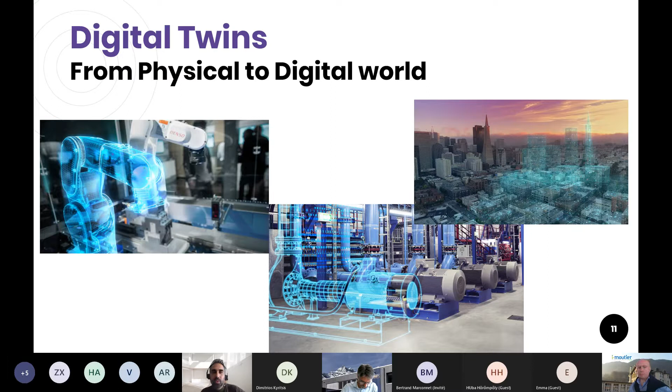The idea of the digital twin is really to create a numerical or digital twin, or double, of the production site or of everything. One of the examples I have clearly in my daily business is building information modeling, perhaps far from the pure production site, but it's really the same spirit. Building information modeling is really to create a twin of infrastructures and to make some predictive or prescriptive models of what will happen, how I can be better, what will be the impact of this information. The idea is really to master what will happen, to make the predictive option and to see what will happen.

To give you at least one example, it is linked to one of the flagship initiatives led at EPFL and from my faculty to create a digital twin on an urban data platform of cities. It's really the same message, and after that will be the presentation of Dimitris to explain it at the level of industries and production sites in manufacturing. The idea of the Blue City project is to create a digital twin of our cities and to make different digital twins of the mobility, the waste management, the energy consumption, the circular economy of raw material, local resource constraints.

Through all the data collected in these different fields, we will create these digital twins, and we will be able to see and to predict what will be better for a better impact on climate change from the city, better air quality, better traffic, and so on, to have these models from artificial intelligence and to predict what will happen.

So now I will give the floor to Dimitris to go further about what digitalization is, but the key message on my side is that digitalization really brings opportunities. This new technology can help industries to be more efficient, to tackle some big problems and to be more agile on the market.

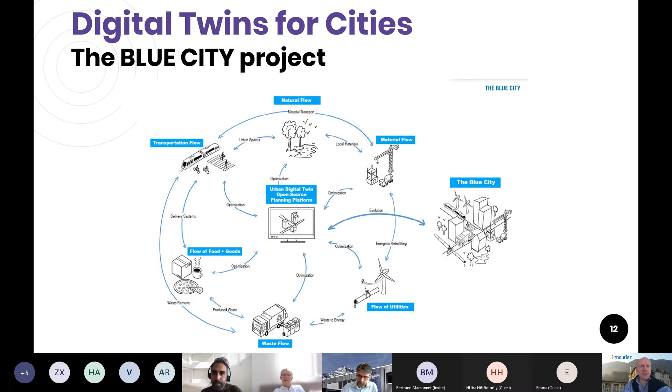Can you give me the right to share my screen? Yes, you can. Not yet. You can't share the screen yourself? No, not yet. The share button is gray in my case. Okay. Just give me a second. It says only meeting organizers and presenters can share. Yeah, it's okay. Is it okay? I think so. Let me find. Can you see my screen now? Yes.

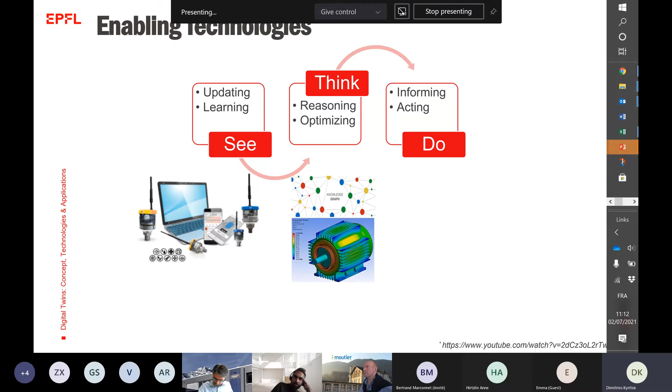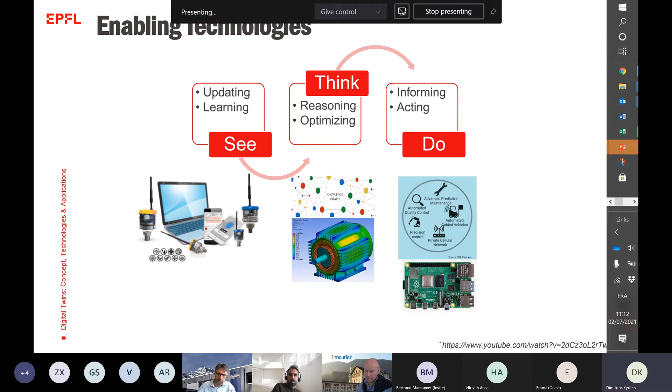How we think and reason: we connect all these elements about the functioning of this motor, for example, where this digital twin allows us to see the performance by visualizing various parameters in color. This allows us to reason automatically, if we can, by applying algorithms, or interactively by visualizing information, and then we act. For example, we apply maintenance, or we improve the design of an electronic component, or we inform somebody else in the value chain to do something.

Internet of Things, as we said before, is one of the basic elements that generated this concept of digital twins. Why? Because it allows us to connect the physical part of the concept to the virtual part, using sensors on the physical part to capture the data and communicating this data to the virtual part and back, of course, to elements of the physical asset when we need to act. So a digital twin may be an actionable digital twin and allow actions to happen on the physical. And as you see here, we have three types of elements.

First of all, the sensors and other devices that can be used as sensors, virtual sensors, for example, ID parts, mainly wireless ID components like RFIDs, and then the communication elements, in various dimensions. You can start with Bluetooth, Wi-Fi, 5G, and Internet connectivity technologies. And how do we use all of this data that's collected and communicated in the Internet of Things? We are using computers, either very close to or on the machine, which is edge computing, or somewhere at the factory level.

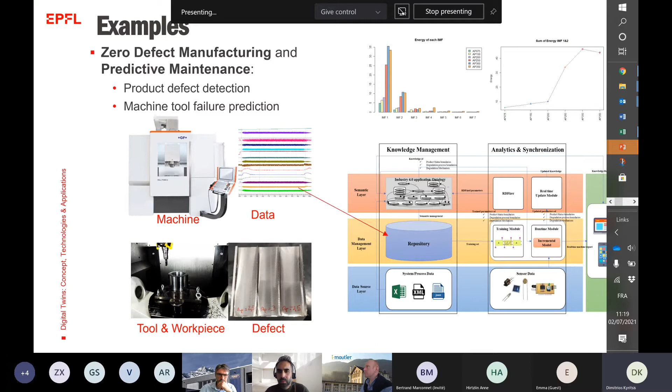And applying various types of tools - RDFizer, for example, is an open source tool to transform an ontology into a knowledge graph - and then analytics of this knowledge graph using various technologies to visualize data and decide, taking actions, calculating the remaining useful life, for example. You see here examples of visualizing machining data that we capture from machines, which allows taking decisions according to the objective.

The concept of zero defect manufacturing is also emerging, and it allows observing and measuring data in the two main actors of the manufacturing process: the product itself, which is the output of the machining process, and we are able, using metrology technologies and sensors, to capture data in various phases of the product's life cycle.

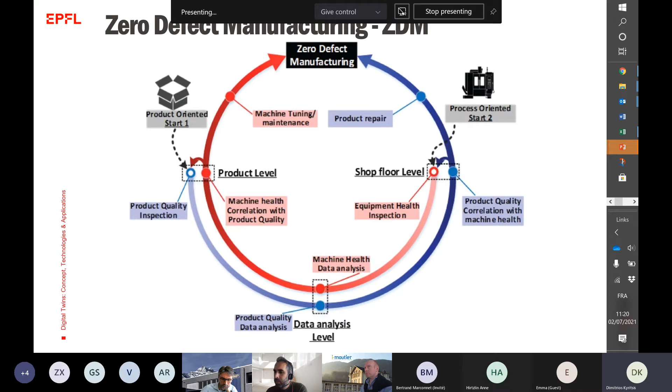And at the same time, when we produce these parts, we observe the health status of the equipment, the machine. In order to allow zero defect manufacturing, the output of the process is the quality of the product. Measuring elements of quality at the product level and at the process level, and correlating these two types of data using digital twin in the virtual world, allows us to detect possible types of defects, repair them if possible, and predict by analyzing the data we collect possible defects. If we are able to predict, we can prevent them. All these strategies of detection, prediction, repair, and prevention mainly contribute to zero defect products and zero waste of the process.

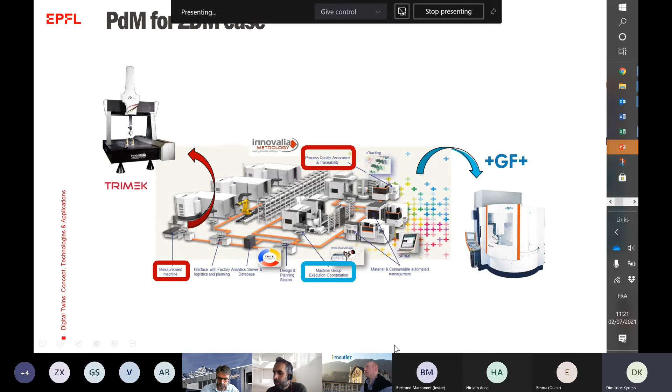So we implemented this concept using metrology technology. Trimek is a metrology machine, and machining technologies, a milling machine, provided by Georg Fischer here. In the case of producing a spindle used in this machine, along the assembly and manufacturing steps, we implemented what we call a predictive manufacturing framework. We collect data from the process - milling machines, CDM machines - and from the product, using metrology inspection machines. We manage this data along their life cycle, structured semantically using ontologies, in what we call a semantic framework.

The output is structured data in the form of a knowledge graph, and by applying appropriate algorithms using digital twins, we can visualize the data so humans can take decisions, or we apply decision support systems and algorithms to take decisions somehow automatically. This was implemented at Georg Fischer with the help of other partners using the Microsoft Azure platform, which offers the possibility to structure the data in this semantic form.

So what we illustrate here is that we collect data during the production of the spindle in various forms - PDFs, text, Excel, or direct data from measuring machines and machine tools, or sensors. All of this is structured in semantic form and then analyzed, for example using Power BI, to be used by various stakeholders - R&D to improve the design, customers, production engineers, etc.

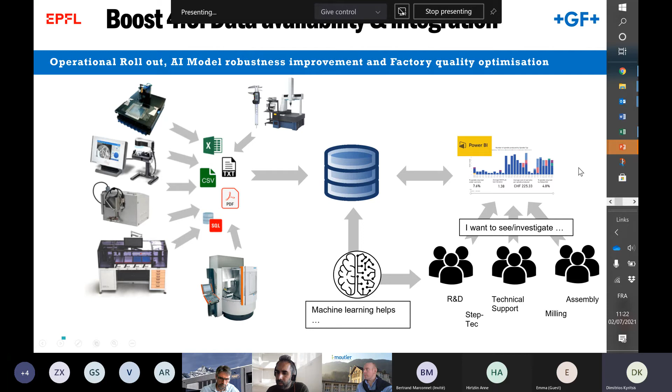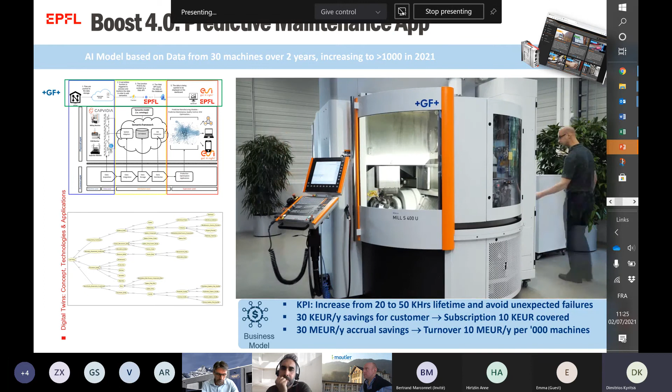In this machine tool, the machine is cutting a workpiece, and we have a dashboard where we observe the various parameters of this type of particular machine. This green color here says that we have still enough time for the machine, the tool, and the spindle to work correctly, by observing various types of measurements.

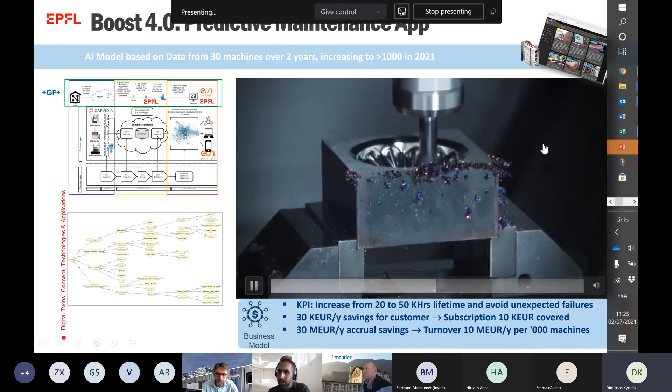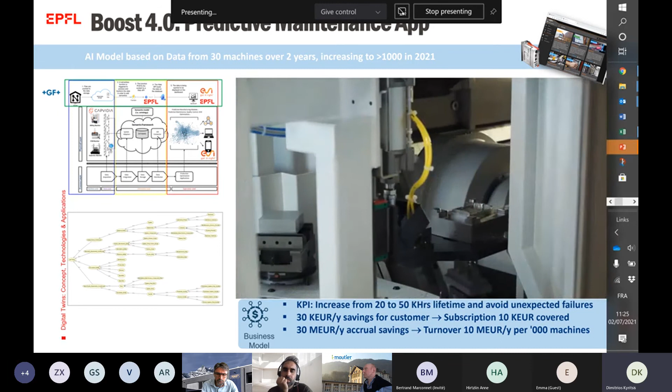Here is what happens after some time - it became yellow. That means the time of doing something is approaching, and maintenance is required. Then we arrive at the red level - it's time to do a maintenance action before something breaks, allowing us to save and extend the life of this type of application.

And some achievements you can see also here. The first type of achievements.